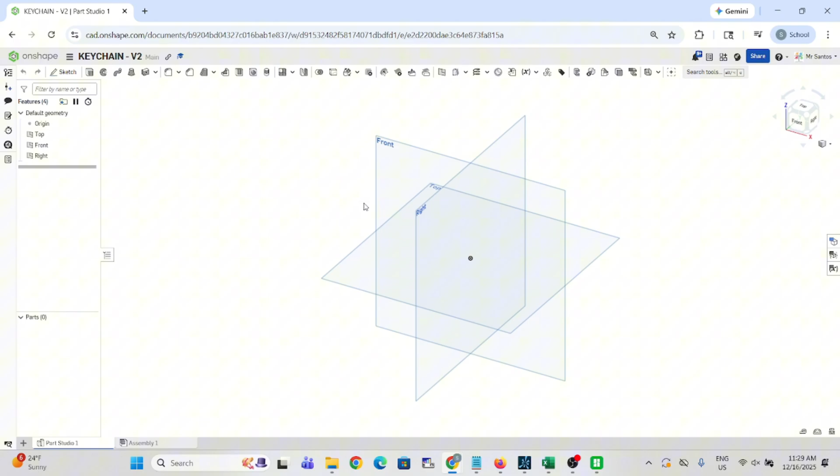We don't need all three planes visible right now. Move your mouse to the left side, click the eye icon, and hide the right plane and the front plane. We'll keep only the top plane active. Right-click on the top plane and select View Normal to, so we have a clean, straight view.

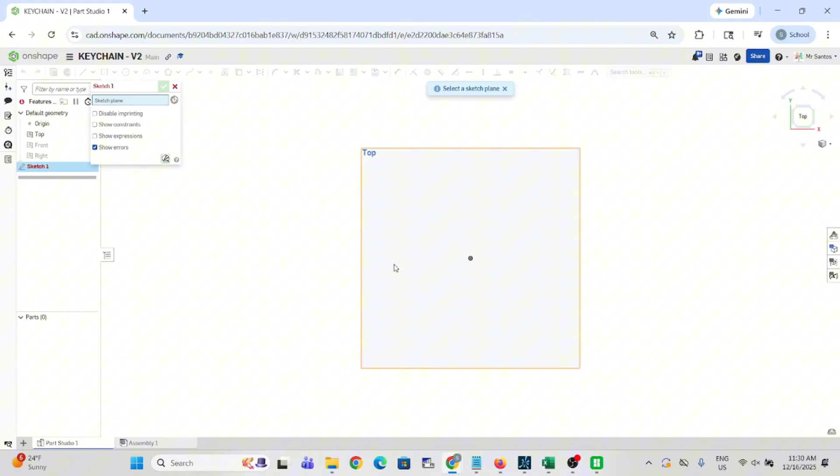Once again, we'll design a keychain with dimensions 2.5 inches by 1.5 inches. Click the Sketch button and select the top plane. Now click the arrow next to the rectangle tool and choose Center Point Rectangle. Click at the center, drag outward, and click again to create the rectangle.

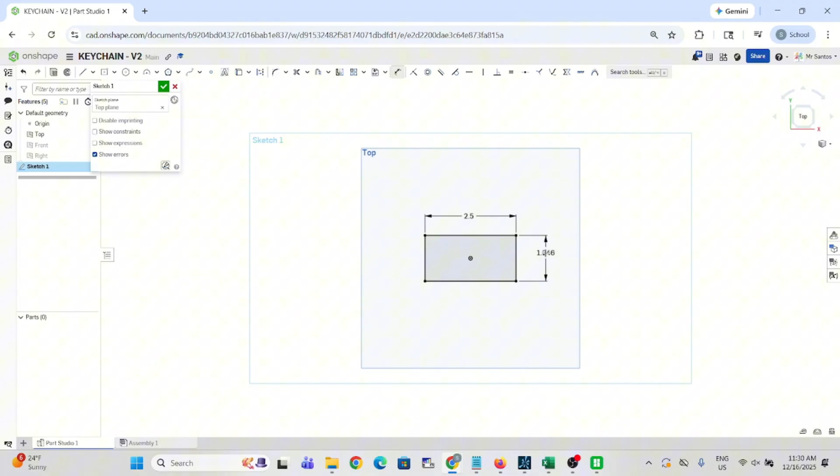Now select the Dimension tool. Click one edge and enter 2.5 inches. Click the other edge and enter 1.5 inches. Next, click Extrude. Set the extrusion depth to 0.2 inches or 0.3 inches, you decide, then confirm. So far, this is similar to what we did in the previous project.

Right-click and choose View Normal to, then zoom in so we can work more comfortably. Now I want to show you a different way to control and position objects. Click Sketch again and select the face you want to work on. Let's name the sketch Hole. Click outside the text box to confirm.

Now select the Line tool and activate the Construction option. Draw a horizontal construction line. Press the ESC key to stop drawing. Select the Line tool and Construction again, and draw a vertical construction line. Press ESC again. Why is this important?

Because now, when we draw a circle for the keyhole, we can easily control and adjust its position. Select the Circle tool and draw a circle where the construction lines intersect. Use the Dimension tool and set the diameter to 0.2 inches. Now, when you turn off the Dimension tool, you'll notice you can move the circle freely, left, right, up, or down, until it's exactly where you want it. This gives you more flexibility and makes corrections much easier.

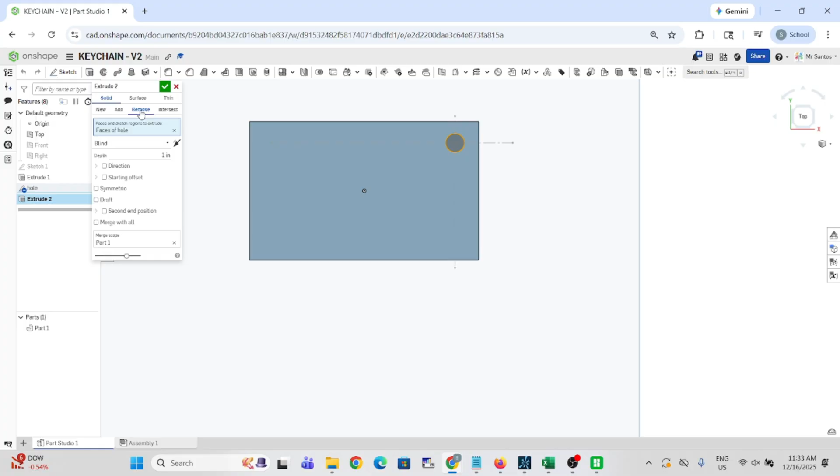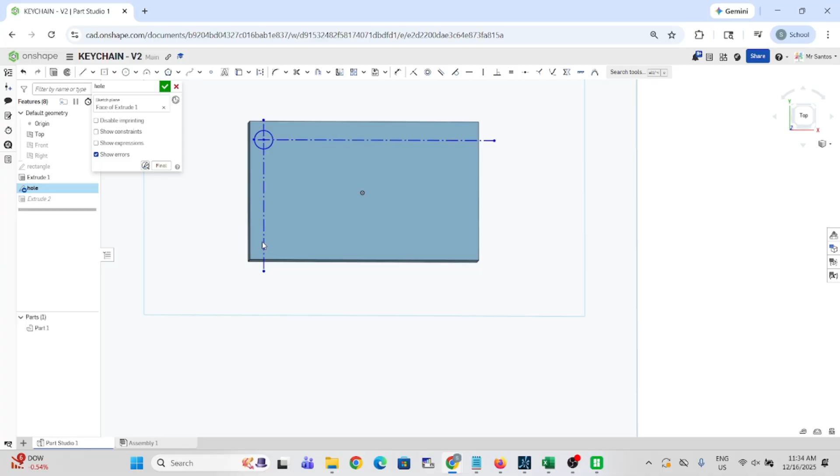Now let's create the hole. Click Extrude, select Remove Material instead of adding material. Confirm the operation. Great, now we have the hole for the keyring. Remember, always name your sketches and features. Double-click the sketch name and rename it Rectangle or Hole so your project stays organized. You can also move the construction lines or the hole later and the model will update automatically.

Now let's add text. Click Sketch and select the face of the keychain. Right-click and choose View Normal. For a better view, you can hold Control and right-click to reposition the view if needed.

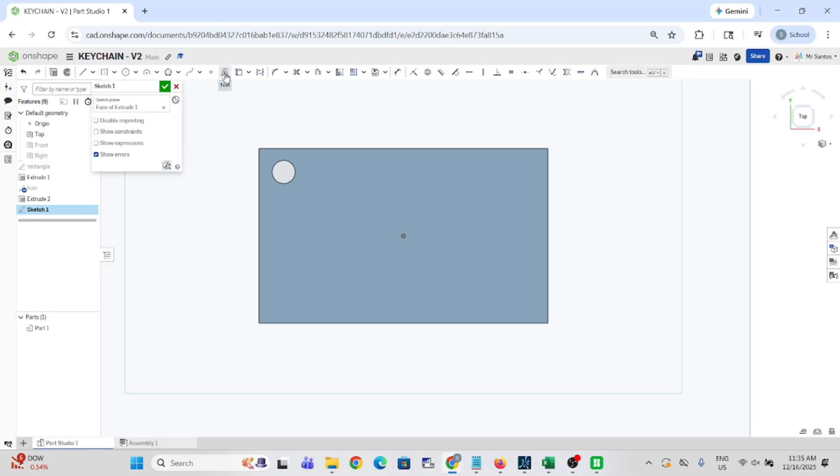Select the Text tool. Click where you want the text and type something like, I love you. Confirm. You can click and drag the text to reposition it. Now let's add a second line of text. Use the text tool again and type something like God, Daddy, or any word you choose. Adjust the size and position until it looks good.

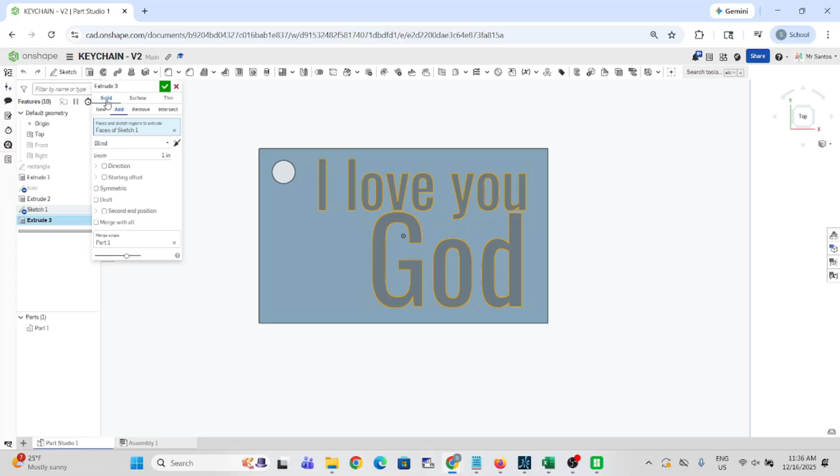Now click Extrude, choose Remove Material. Set the depth to 0.15 inches so it doesn't cut all the way through the keychain. Confirm. Now your text is engraved. If the text looks too close or too large, you can edit it. For example, you can reduce the size to 0.65, move it up or down, and fine-tune the position.

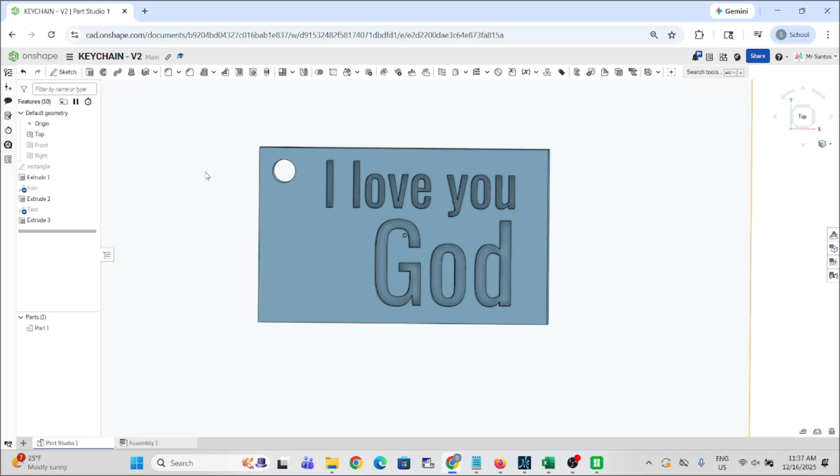To make the design look even better, let's round the edges. Select the Fillet tool. Click on a corner edge and set the fillet size to 0.15 inches. When you select the other edges, Onshape will automatically keep the same value. You can also apply fillets to other curves to improve the overall design. Remember to rename features as you go. This keeps everything organized and easy to edit later.

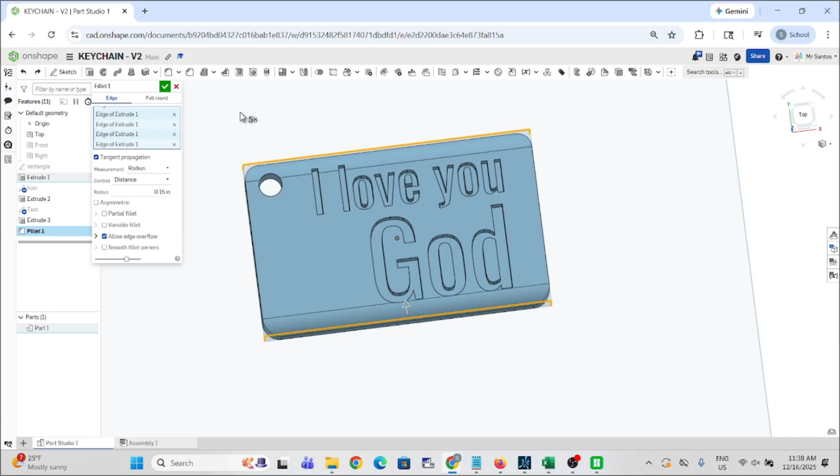And there it is, your new keychain design. More creative and more professional. You can always come back, adjust dimensions, move text, or change features.